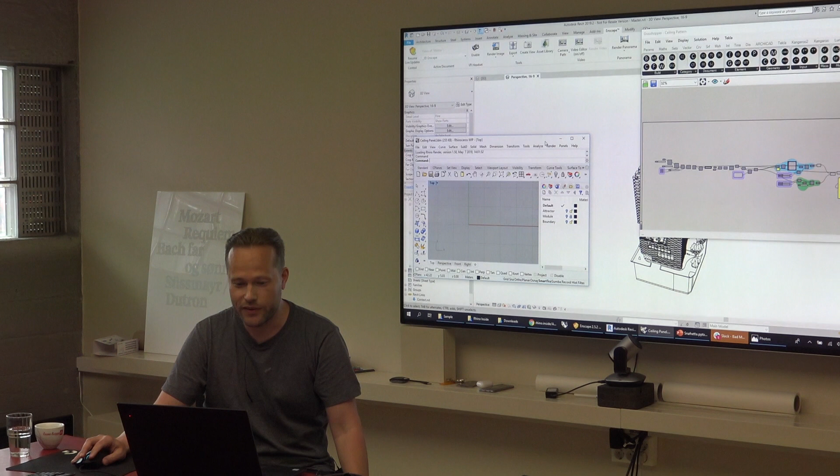So let's see what that looks like. I'm going to do this now, and with permission I asked to show some kind of fantasy workflow on the BLF project. I found one of the old Revit files from, I think, a long time ago - maybe something changed, but anyway, that's less important.

So basically what I do is pretty simple: you have a Revit project, and then you start Grasshopper from within the add-ins menu of the Revit project. Even the first time you click on it, it feels better than Dynamo, because you can start it in a perspective view, which is not allowed yet in Dynamo - Dynamo will just give you a red warning if you do that in perspective in Revit.

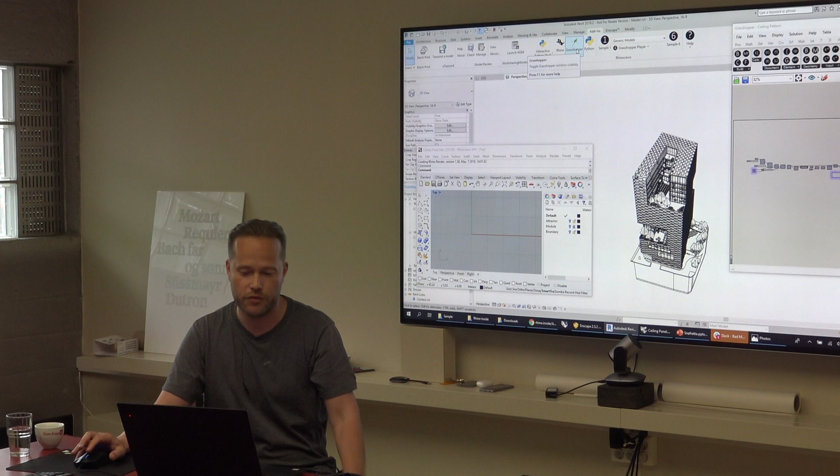And then you get something like this, which is everything Grasshopper with all the menus - Archicad, Tekla, Kangaroo, Lunchbox, and so on - and the Revit tab that interacts with the Revit API. It's funny that all the dots are black.

It's really, really early stuff, so they haven't done anything with the icons or anything. But who are they? Who is developing that? McNeel, okay.

Yeah, it's McNeel mostly, but it's an open source project on GitHub. It has a project for Revit, a project for AutoCAD, and I think even for some Adobe application. In Rhino Inside you can click and see Adobe Illustrator, Autodesk, and Revit. This is where all the Revit API functionality is being built by an increasing user community in addition to the McNeel guys. You can go here and read if you're interested.

So, have you ever found some comment from Autodesk about what they think about it? Nope, no. I just think they think it's great. If I was Autodesk, I would think it's great. And I think McNeel also thinks it's great, but I don't know about Autodesk. I don't really care.

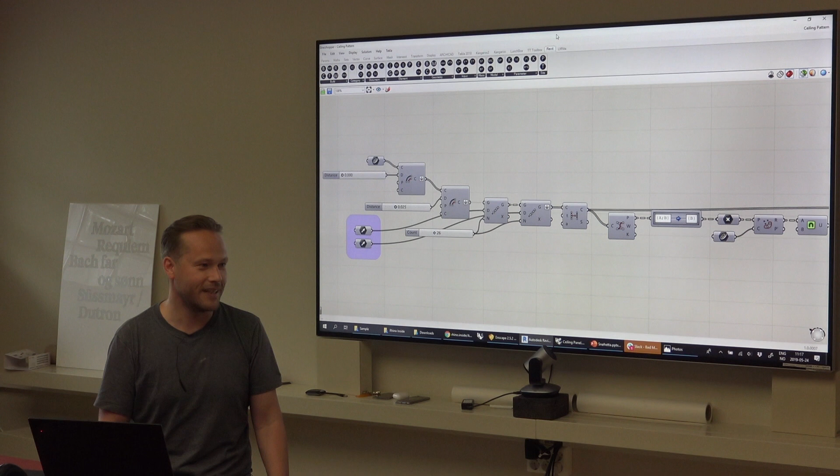No, Autodesk opened up the API for Revit in 2005, and by doing that you basically say anyone on the planet, five billion people, is free to develop add-ins or applications for our platform. So I don't think they discriminate who is doing that and who is not. So anyway...

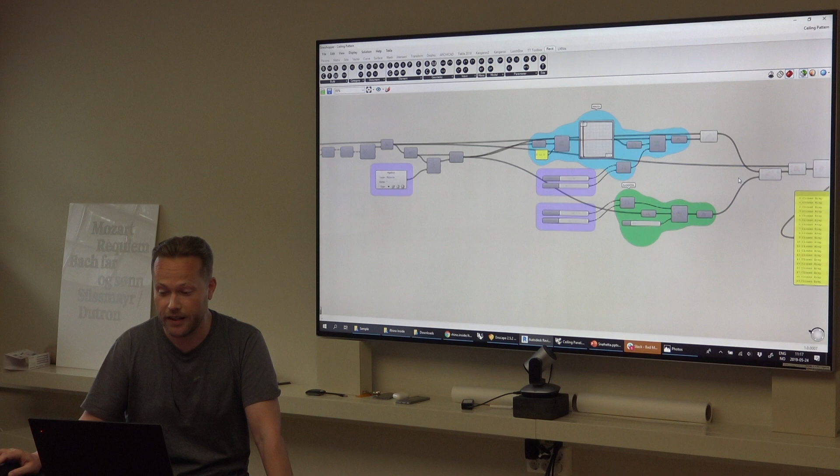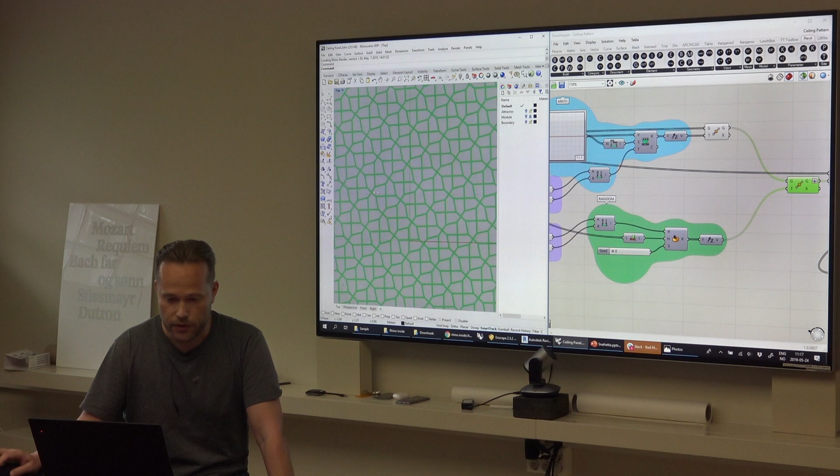This is - I was able to find some obscure Grasshopper script that was doing some kind of ceiling test on the BLF project. It has some math and some randomness, and if I do like this, you can see what it's doing. Yeah, so it's just a pattern of polylines that's being repeated in a grid.

Do you remember this? Yeah, Reynold does. I think it lasted for a few days, this exercise. But anyway, I'm just using it to show how this can work.

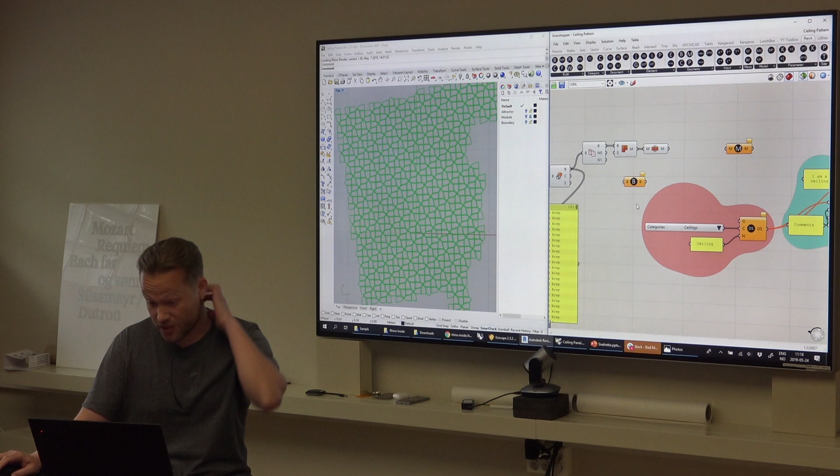So in the end here, I'm getting a bunch of B-reps. There are two attractor points as well, kind of creating this shape by the window behind the lecture in the lecture hall of the BLF.

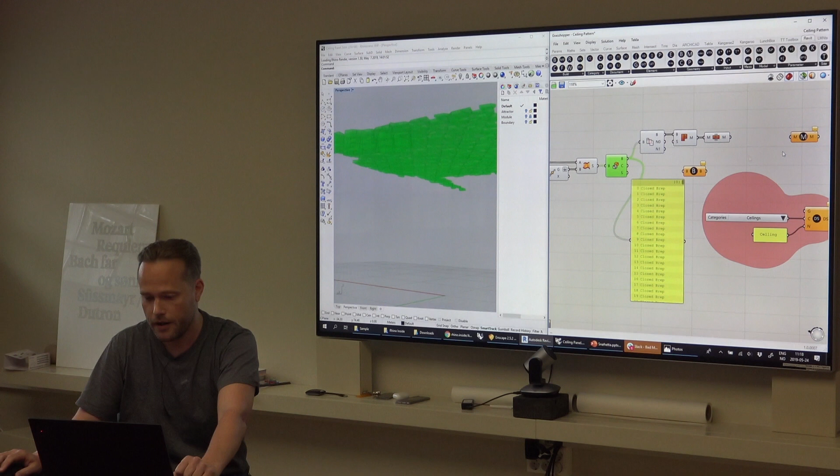And then I'm trying this now because this is kind of the development we're doing right now. I'm trying it with a bunch of closed B-reps, with some merged face B-reps, with a bunch of mesh and a joined mesh. So that's kind of what I'm testing now.

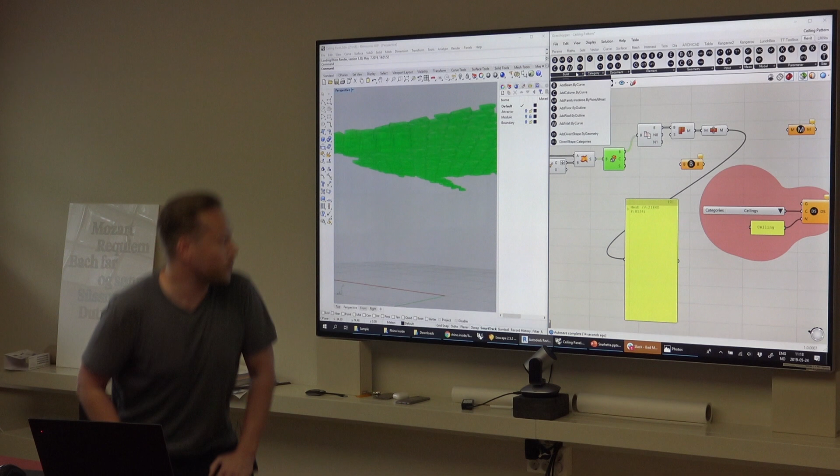You can, with the Revit menu, build a bunch of different things. But like I told you, Romana, on the phone, where Grasshopper for Rhino Inside really lacks is the amount of available commands. In Dynamo you have thousands of components you can do different things with, because there's a huge community that has been developing on it for like 5-6 years. Here it's a very limited amount of things you can do in Revit.

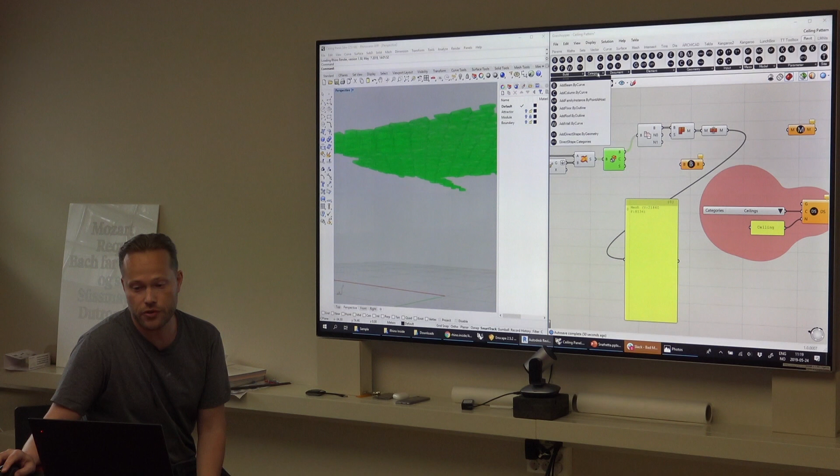So you can do a beam by curve, column by curve, floor by outline, roof by outline, and so on. So you can build native Revit elements based on Grasshopper data. You can also edit information, work with categories, extract document information, and also work with parameters - for instance, writing a parameter or reading a parameter from some Revit element, or a bunch of things.

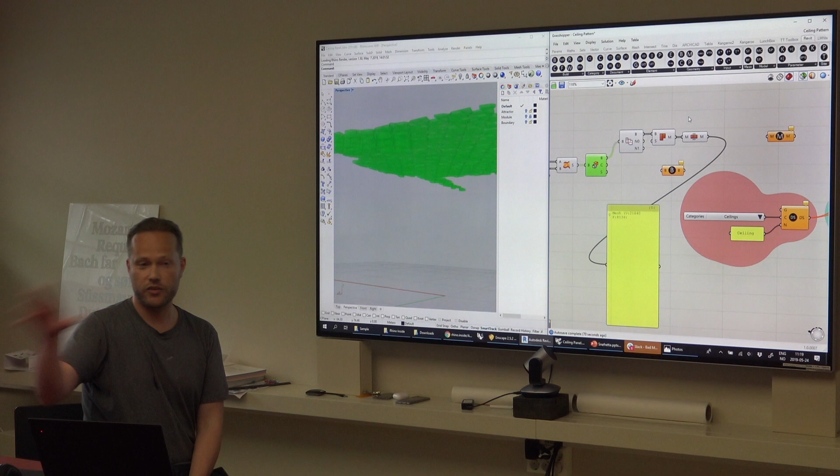So this first exercise, the first problem we're trying to solve, is to just get Rhino geometry into Revit in as good a way as possible, with materials, for force-project, sketch-project, schematic design kind of situations. So this is just a very...

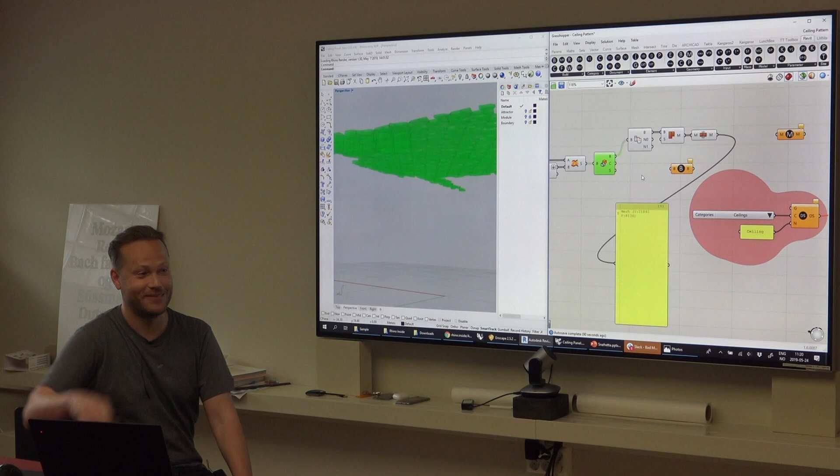Yeah, that's definitely kind of our main business model. So anyway, just want to show a couple of quick things of what this can become in Revit. I have a 3D view, and when I click on some node, the geometry preview is already a gazillion times better than the one in Dynamo.

And it responds to preview selection in the exact same way that Rhino does. And then there's a couple of different ways I can create geometry from Grasshopper inside Revit.

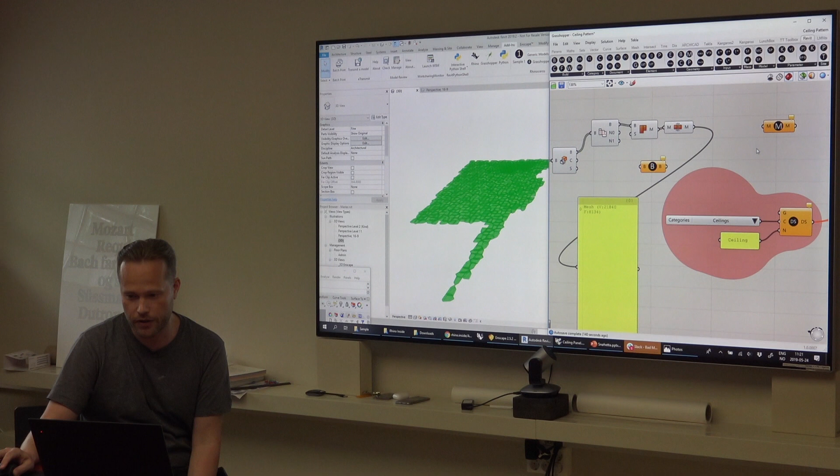We can try with, I have a B-rep. If I have a B-rep, there's a B-rep component. So when you hit the button in Grasshopper, it shows a preview in Revit that is not bakeable yet. Is that the thing? So you have to bake it with these buttons. And then, of course, with Rhino and Grasshopper, you can just right-click bake because they are the same.

In Revit, you have to say, in Revit's language, I want this to be something. I kind of bake as this or bake as that. And that's a whole crazy ball game to understand, because Revit can build so many different things. But in recent releases of Revit, they introduced first a direct shape element, which is just dumb geometry. That was what allowed them to do the link IFC feature in Revit many years ago, direct shape.

And then they also introduced an actual B-rep, so you can build a B-rep in Revit now. That's why you have an Add B-rep Shape by B-rep component. So that's a category, B-rep. But still, Revit's B-reps are more strict than Rhino's B-reps, so they sometimes still fail.

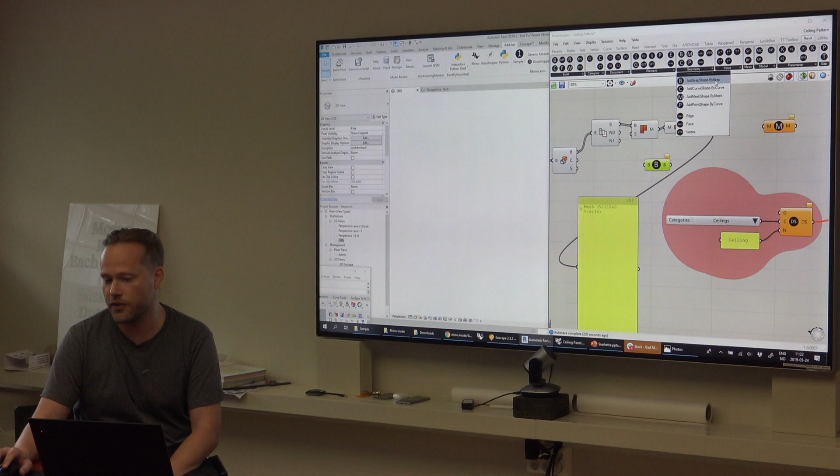But this is really interesting, and all we usually want to do in a schematic design situation is just build some geometry and put a material and category to it, and that's enough. So when I say generic model or whatever, you have a categories pull-down menu that pulls the Revit categories, and then you can assign categories to it.

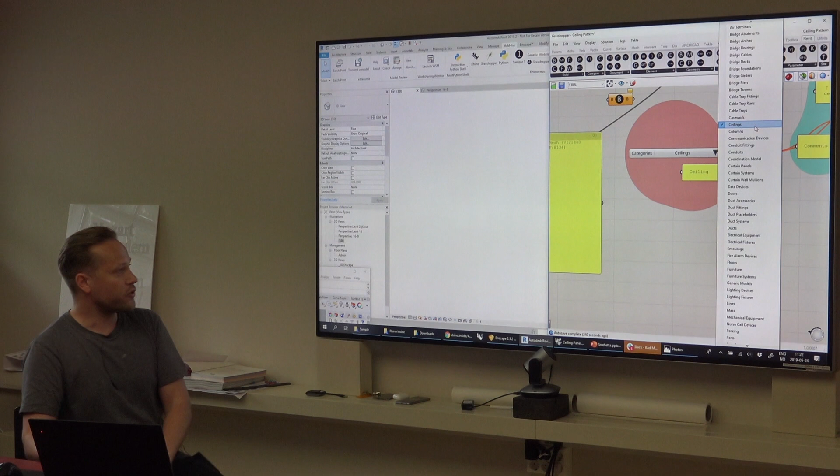So what we're trying to do now is just build so you select a category, it's a ceiling, it's a wall, it's a railing, it's a stair or whatever, and then you put some parameters to it, for instance like IFC class or whatever kind of information, and then we just want to build a bunch of stuff, like railing is specifically painful in Revit. So that's I think really interesting to be able to work in that way.

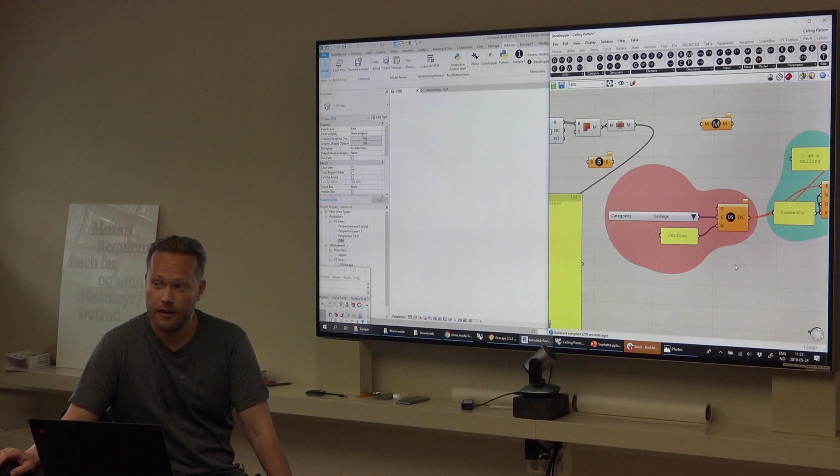Where is your input? The input here, it takes basically just a bound. It's in Rhino actually, so you can't open Grasshopper without the Rhino file? Yes, you can. But unless, actually the tool here says Rhino toggle Rhino window visibility.

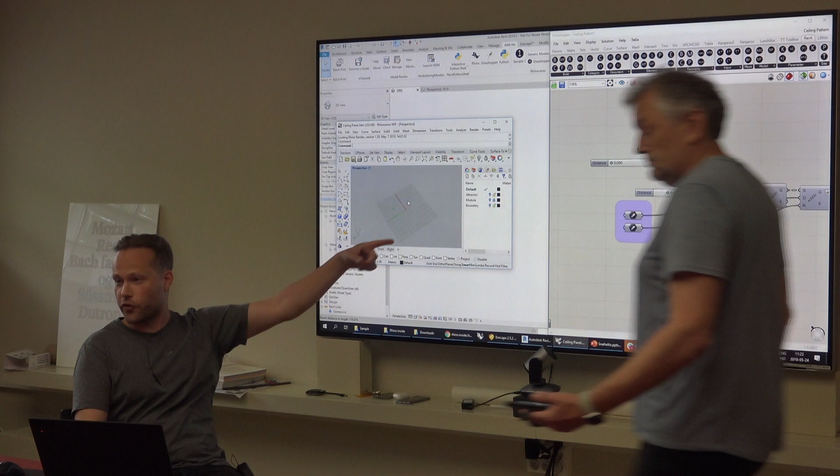So I think the moment you click on Grasshopper, it also opens up Rhino in the background. So these two processes are now running inside the Revit application. But you actually, if you reference some geometry from the Rhino window, you have to also open Rhino. Reference stuff from Revit.

Yeah. Where is that? Here? Here. Select edge, select face, select vertex, select element. But the only input you have here is a point. The only input I have here, I have a couple of attractor points, and points, and then a boundary, and kind of the main shape of the ceiling.

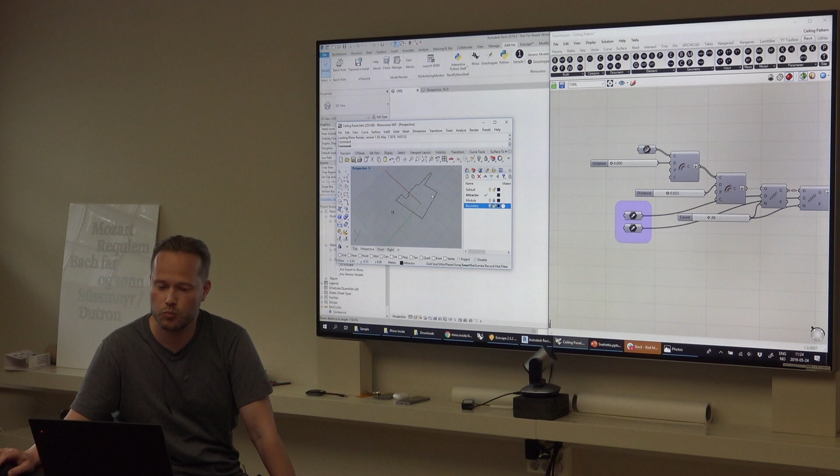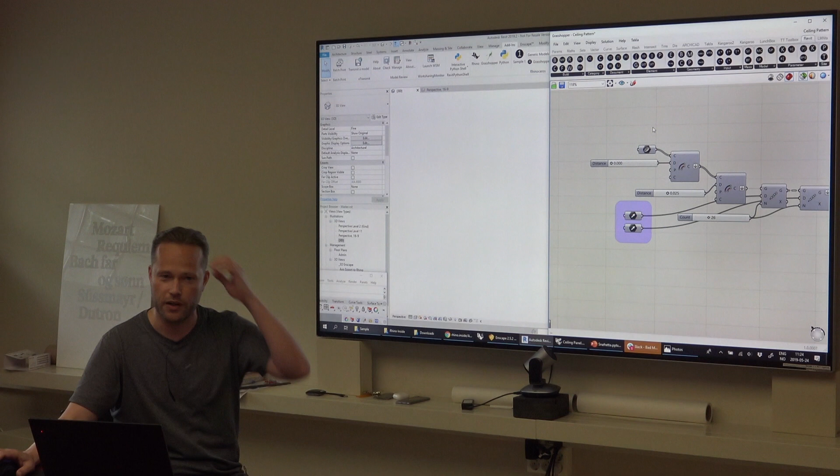Is that a Grasshopper and Rhino file that were done before, and then you open this pre-done file? Yes. Also forgot to mention, you need to have Rhino work in progress. It's not going to work on Rhino 5 or 6. You need to install Rhino work in progress. But if you have a licensed Rhino 6, that's not a problem, you just download it, but it expires after, I don't know, 30 or 40 days or something.

I think we have our analysis stuff. We have it. Instead of using that boundary line you have in Rhino, you can use a boundary line straight from Revit instead.

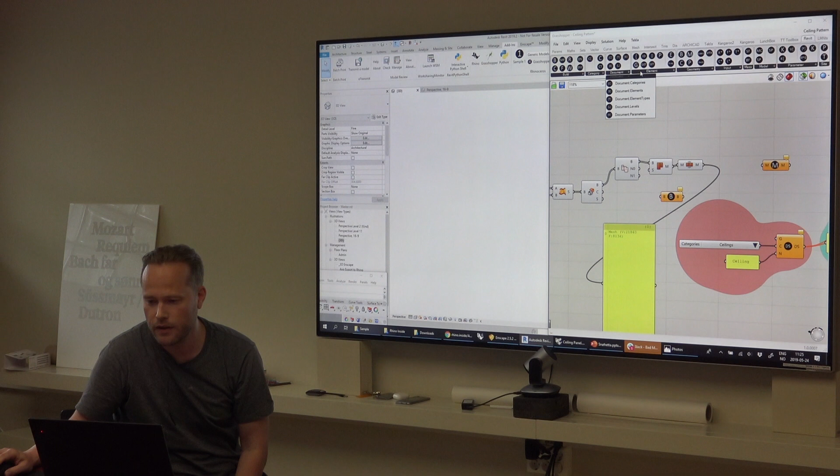Or like a floor, a regular floor? Yeah, like that. Select floor. Where is it? Somewhere here. You reference an element, document elements, or I don't remember. Do you need a Rhino file? No.

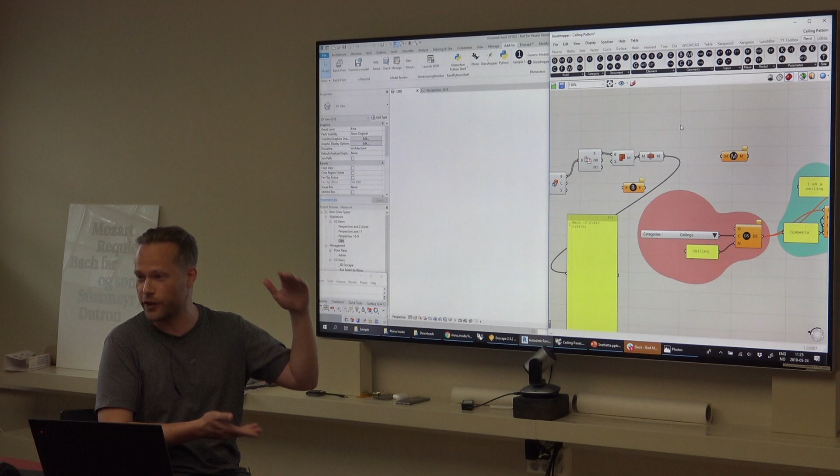Anyway, I just wanted to quickly, before we finish up, show how you can create a B-rep. This is a B-rep in Revit, or actually a bunch of B-reps.

And they are linked to the Grasshopper file. So whatever change I do now, if I move the attractor points or do whatever to the boundary, it's going to update. The funny thing is that in the first alpha version of Rhino Inside, they already solved kind of like the linking issue of Dynamo in a better way than Dynamo was able to. I'm talking a lot of shit about Dynamo now. Dynamo still has a lot of...

But, can you just show it? How, sorry? Can you just show it? Demonstrate it? What, that it's changing? Ah, that's like you're asking me to do the demo hell. Of course it's going to break, but yeah, maybe we can show it at the end. But I just wanted to show a couple of the other things.

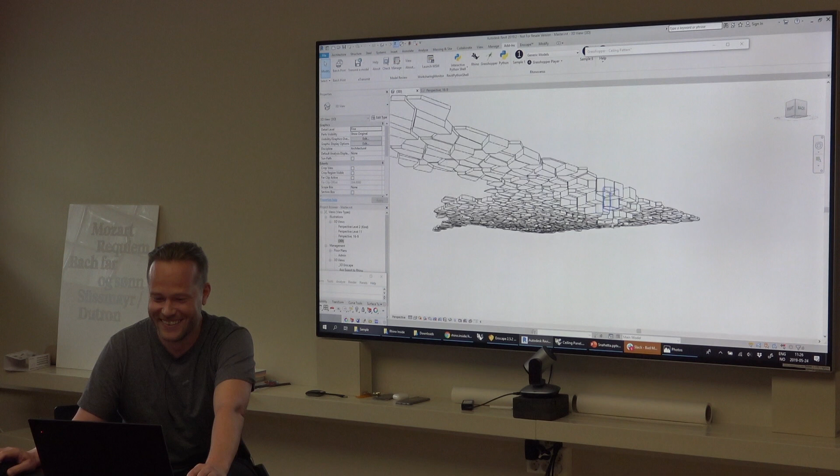No, so anyway, this is like more than 700 elements, and I think that was pretty quickly generated by Grasshopper, and it's separate elements, kind of like the facade cladding that we did on BLF. And now I can put a lot of information to these elements, but there's no material, and that's kind of the main thing missing right now for this to work.

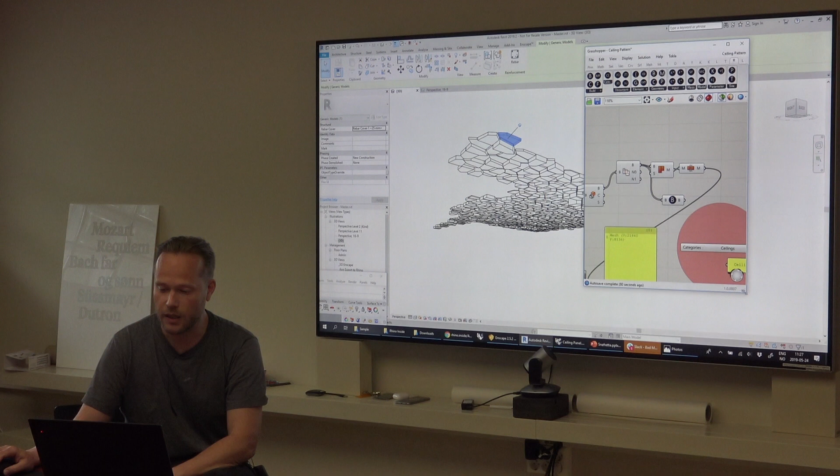So the B-rep generator doesn't have material or category or name input. It just takes a B-rep and creates a B-rep, and then you have to... so we have to build something.

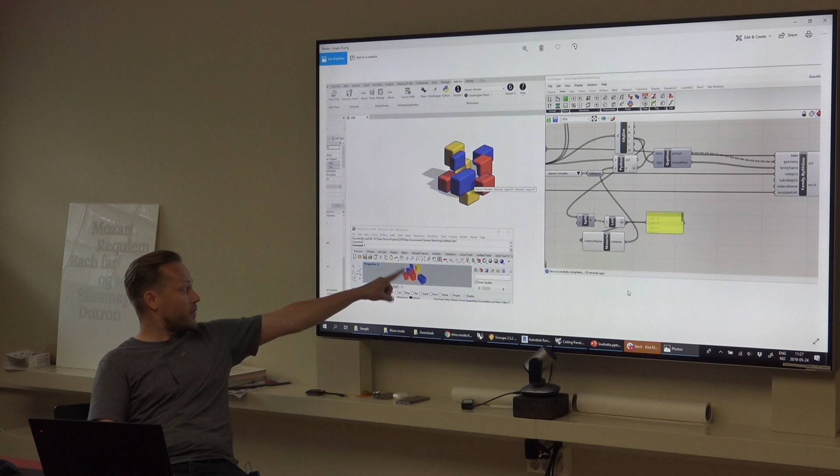I got this picture from Dimitar like 40 minutes ago, and I sent him a Rhino file with 3 different layers with 3 different materials, and I think now we're able actually to recreate that in Revit with also solid elements with materials. But I don't have that file here now.

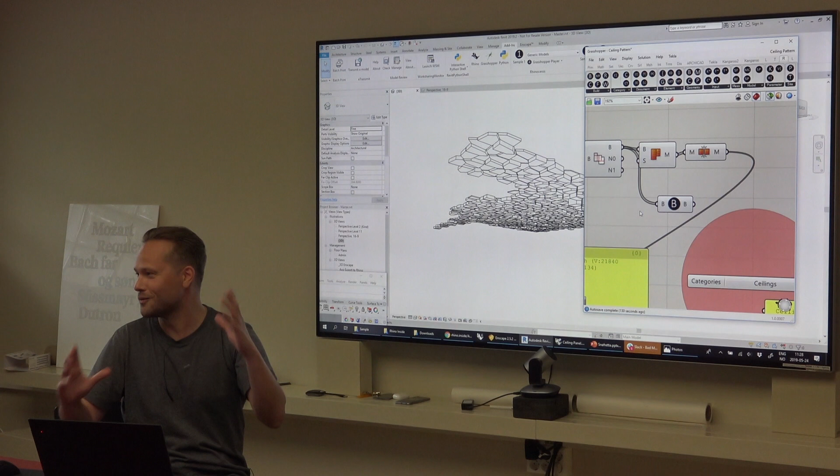And so yeah, this will update. Because basic materials, you were able to get those when you open a Rhino file in Revit - you will get a layer color. But then you change that material, and you delete it and import again a new version, and then it doesn't find this. So that's a broken workflow, and we're trying to make that better.

Also interesting is that it's locked. These elements are locked to the Grasshopper script as long as these elements are pinned. So if I unpin this element, it's going to create a duplicate with the Grasshopper, and then forget about the previous element. So if you then create a new one, you will have two.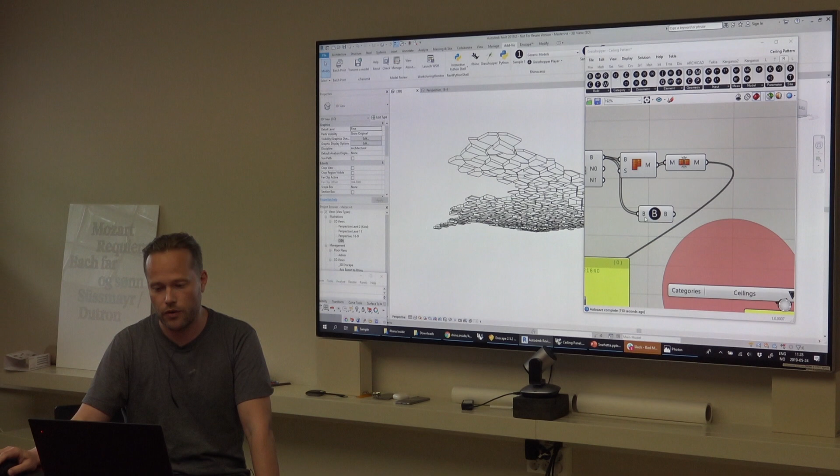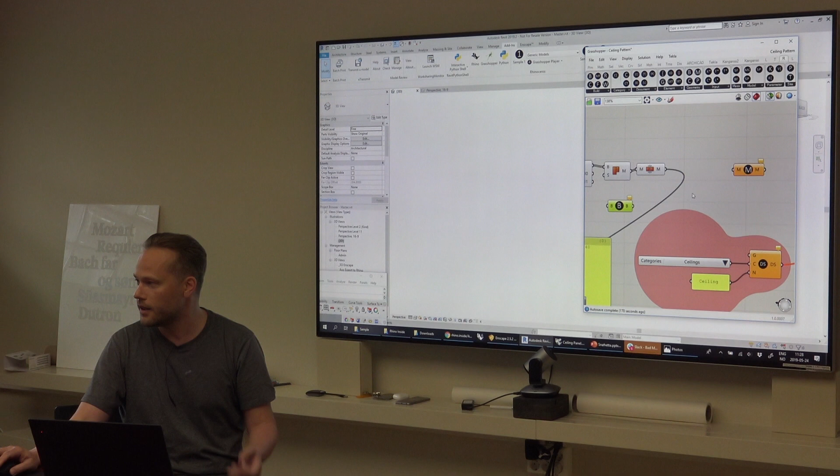I will disconnect this guy here, and then I'm going to select all of these guys, unpin them, and then delete them. There's a lot of this, like how Grasshopper is now interacting with Revit, that doesn't work that well. But I think the potential is amazing.

So I can also show how it can create one uniform mesh, because as you saw in the picture, I have blue, red, yellow. I want them to be the same material, and I want them to also be the same element, because you don't want 4,000 stones inside a Revit model. It's huge. So you want 1, 2, 3 elements, and this is tricky.

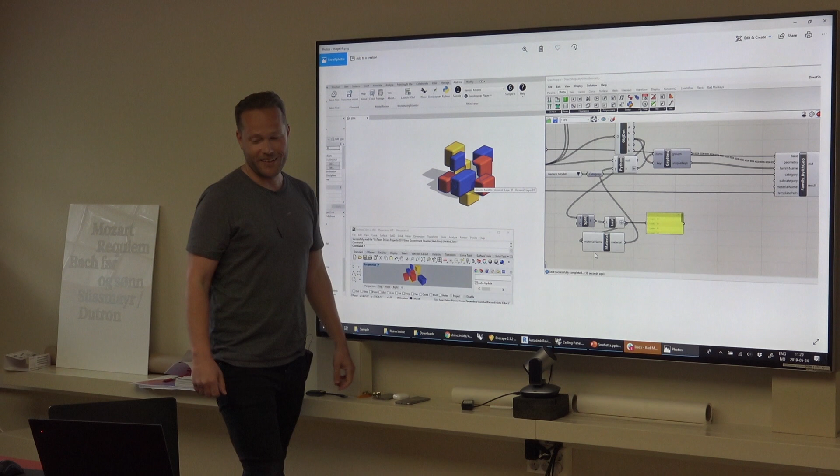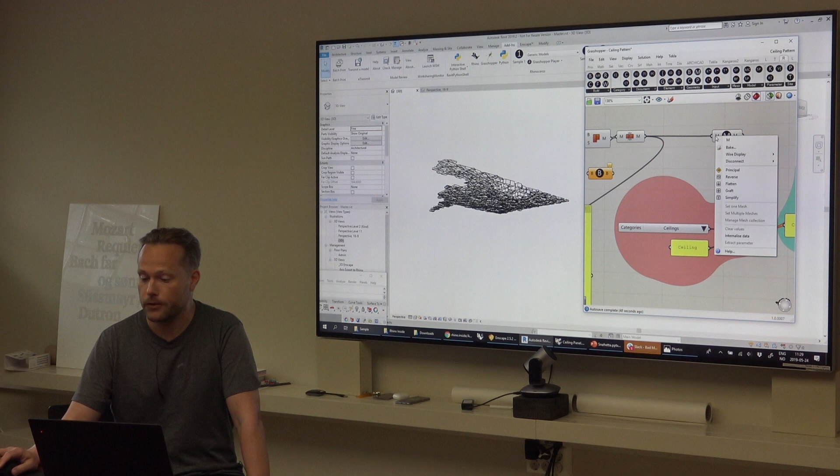Yes, Martin. You're not baking it; it's just baked immediately when you plug it in. Yeah, and then one point in future, you're going to be... I don't think that works now, but I want to be able to right-click and bake, and then it loses the connection. So that should be pretty simple, probably. You just need to unpin it, basically, in Revit. But would you be able to reconnect it again, then, you think? I don't know.

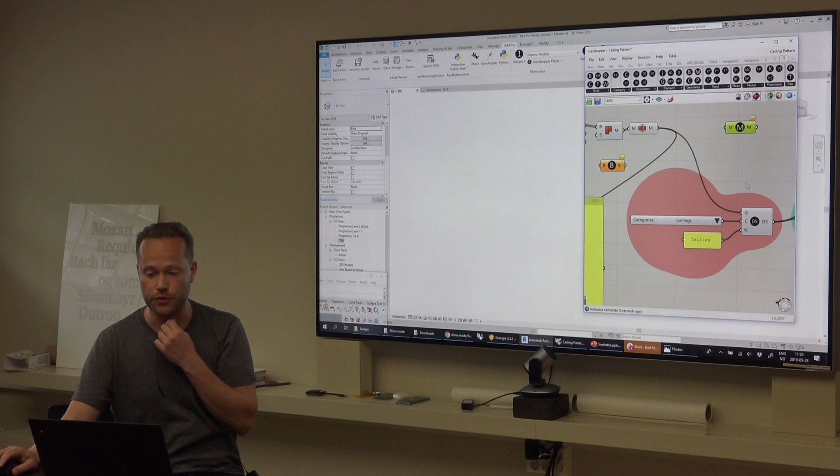So I'm going to take that one guy away and just show quickly the last option we have for dumb geometry, which is a direct shape that can take any type of geometry, whether it's a mesh or a B-rep, open or closed, and then assign a category to it. Because these previous two guys, you can create a mesh in Revit, you can create a B-rep in Revit, but they don't have material, category, or any kind of other input. But the direct shape does have category and name, but not material. So that's what we're working on right now.

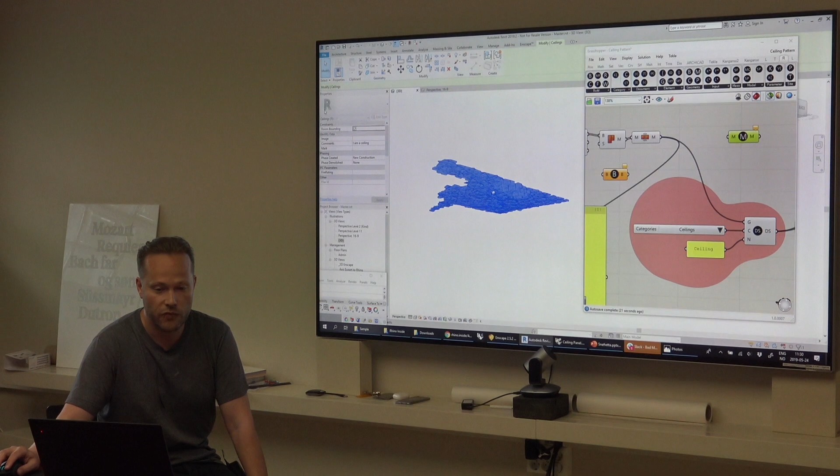So this now will become a ceiling element. Ceiling. And you can also add some parameters to it. I am a ceiling. All right.

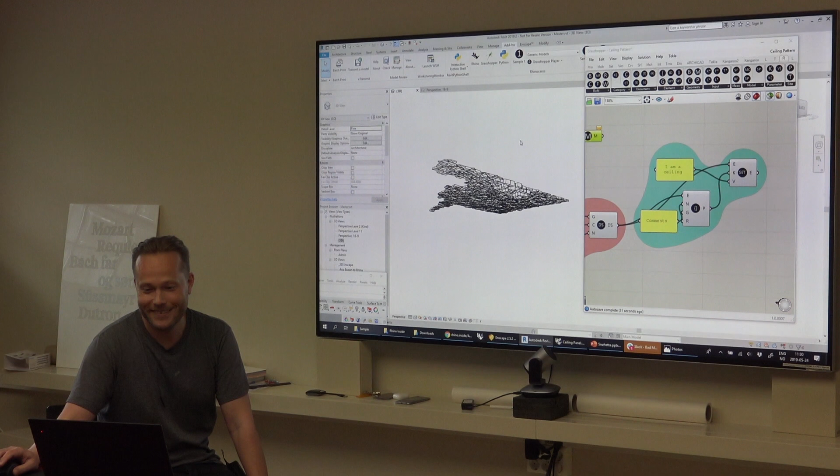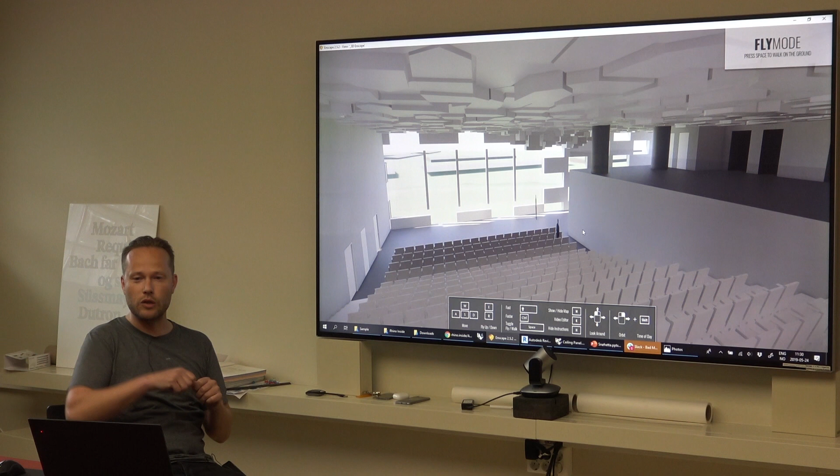And then, of course, it's all updated in Enscape. So that kind of workflow I see now a lot of architects are using to work in parametric, not to model one wall and one door, but to model more complex shapes.

Every time you modify an element, if you have more than 50 or 100 elements, it makes sense to make a script, whether or not you're the only one using it, or you want to share it with others to scale that value. And going from there to a gaming environment in Lumion, Unreal, or Enscape, being inside that model, that's something I see a lot of people are now really interested in.

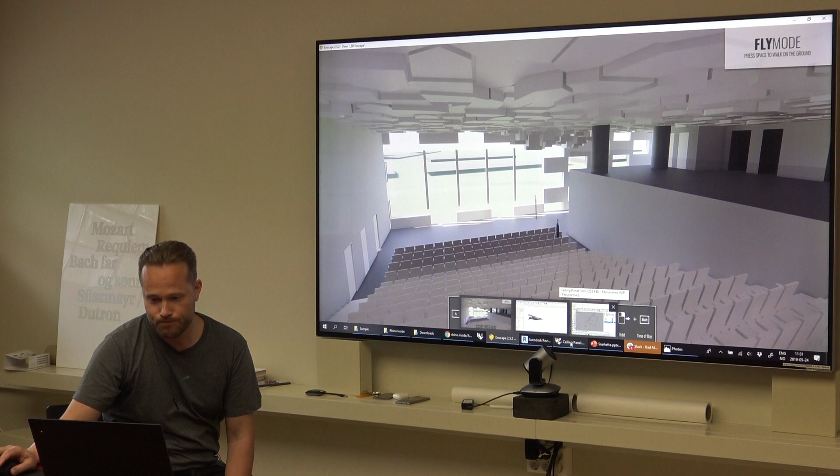Just to finish up the presentation itself, I wanted to repeat what I just said I guess. Future. Is there a future? Yeah, something like that, there we are, let's go.

10 years ago, you had one tool. Today, maybe you have 3, 4, 5, 6. In the future, I think people are going to have a big collection of tools, and it's a difficult job to connect all these into one workflow.

I know the guys I'm working with at the government quarter, they are using Revit, Rhino, Grasshopper, interior architects with ArchiCAD, engineers with Tekla, Enscape for visualization, and then exporting to CFD, and I'm the Revit API guy. Stitching this whole system together without exports and imports is one thing we're trying to solve, and the other is more automation-based design, documentation, and communication.

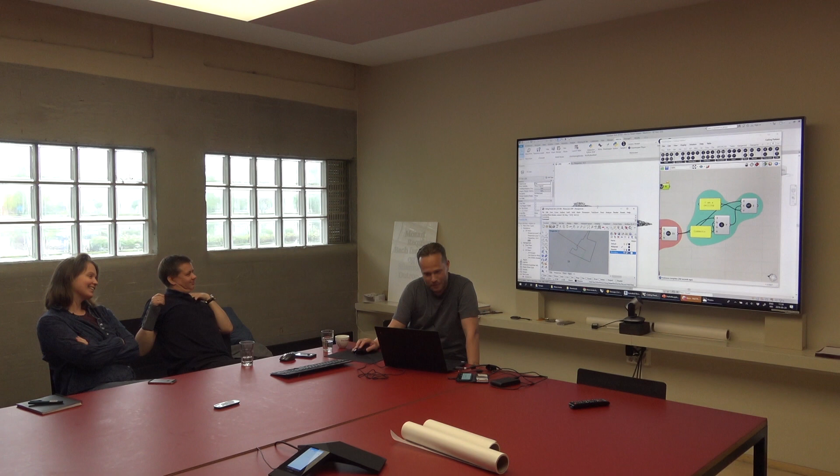Now you are free to leave, but if you want to hang back, I will sit here until lunch, I guess. Can you just drag the slider and change the shape? I was hoping you had forgotten. Maybe we can do something fun, Martin.

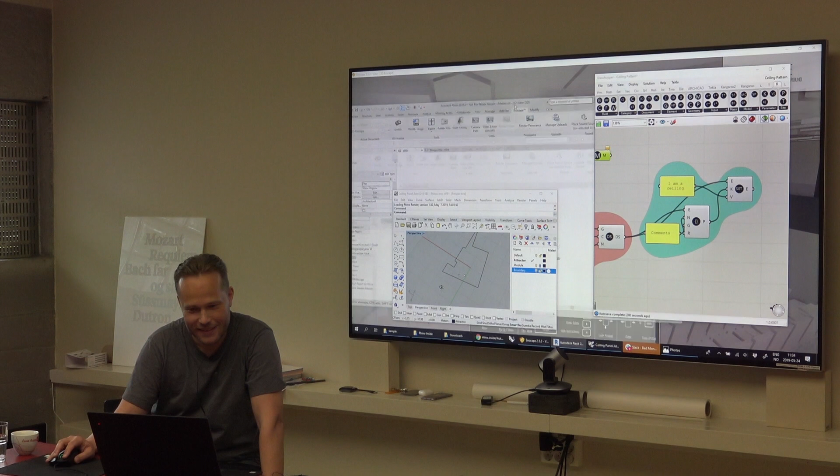What if we just try... I'm going to say Enscape, resume live updates. That's a good idea. And then minimize everything except Enscape and Grasshopper. Let's see, but if I minimize Revit it's going to also minimize Grasshopper, so I have to keep it down here. Okay, like this. And then Rhino, we don't need you.

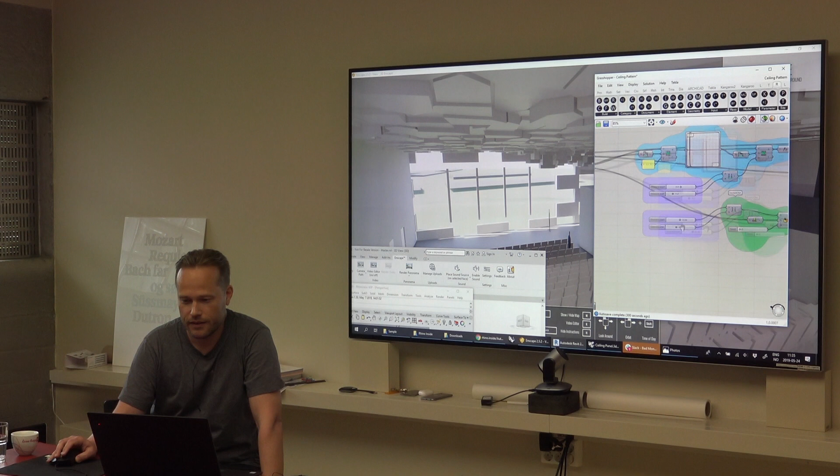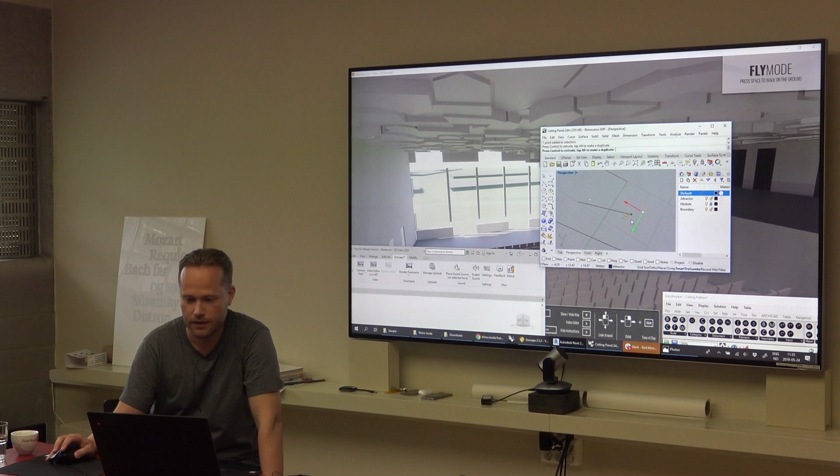Let's see what we can change. You just move the attractor point. Yeah, then I'm going to take down Grasshopper and open this and then take that point. I need to do it like this. Where's my gumball? There. Let's move it over here.

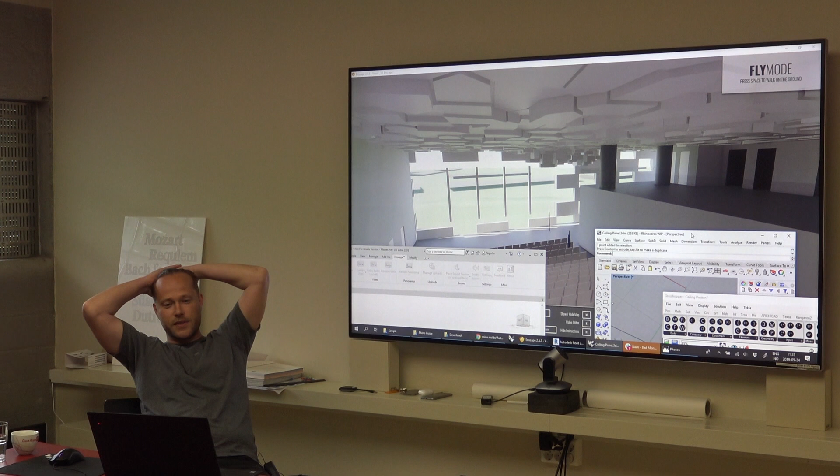It's a pretty big Revit model, so it probably takes a little bit of time until Enscape updates, but I can clearly see Revit working. Oh, there we are.

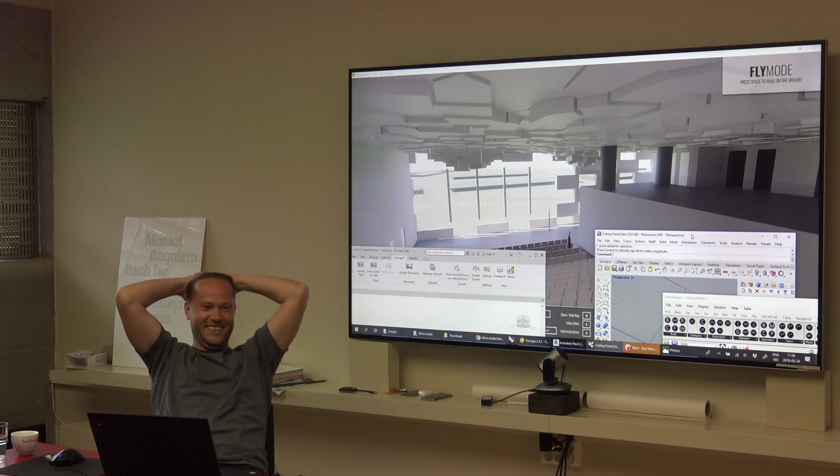I am quite amazed, I'm just wondering about your thoughts on the next step, or differences between Rhino Inside and Dynamo - how Dynamo is... it is still better, but I see kind of the direction going different. So what does Dynamo have? What's the future of Dynamo?

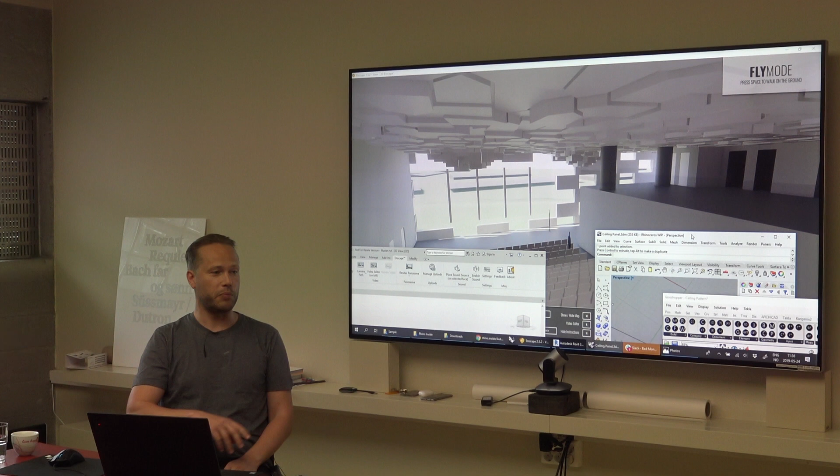I think where Dynamo actually has real potential that Grasshopper will never have is automating Revit. You can create a Dynamo script that opens 500 Revit models, runs 500 Dynamo graphs on each model, and just creates a bunch of data. You can automate Revit because Dynamo can tell a Revit session what to do.

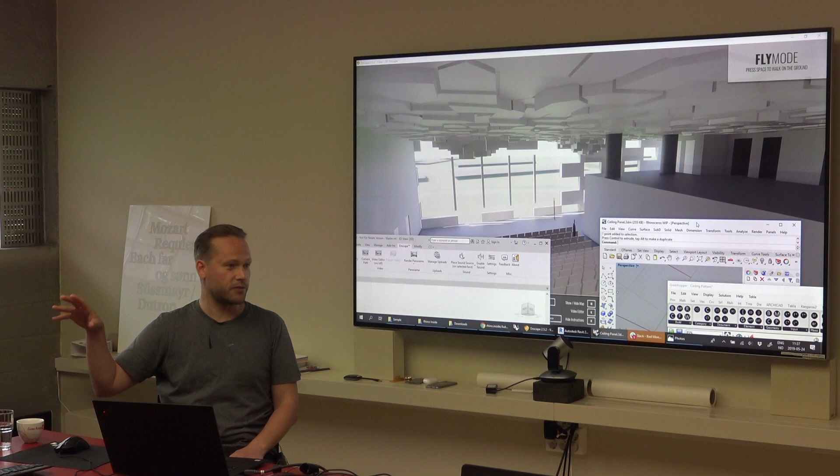Extract all the walls and all the information on all the walls and put it in an Excel spreadsheet by tomorrow morning. That kind of stuff is what we're trying to do a lot on the government quarter and also elsewhere.

If you've used both programs, the Grasshopper user interface with shortcuts like Control E, Control Q, moving around, copying, how lists work, I think it's a little similar in both, but it just feels so nice to work with geometry in Grasshopper. People doing geometry in Dynamo won't do it for very long, but people managing data in Revit will continue to use Dynamo.

Numbers and text - how much data can you transfer? Can you transfer numbering and lettering and anything like areas?

So when you do schemes for this type of roof, how useful is it? Well, the lines are everything is there, so you can easily do drafting and measurements.

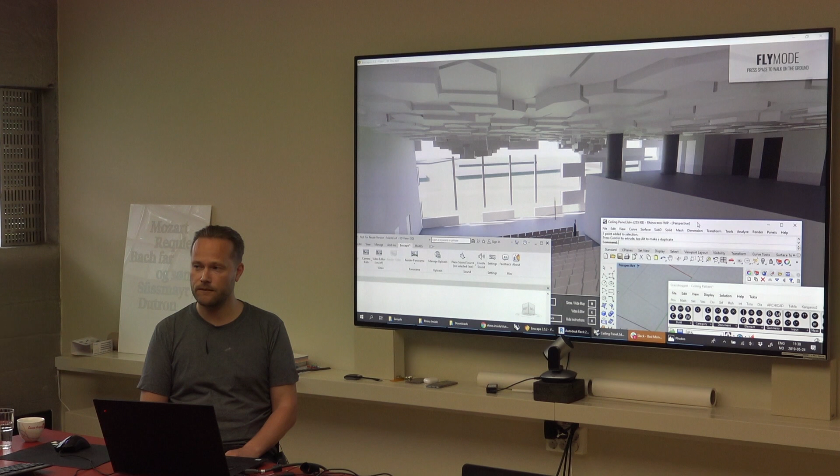That comes back to how good a job the McNeel guys on GitHub are doing this, because Rhino and Revit are at the core of the software.

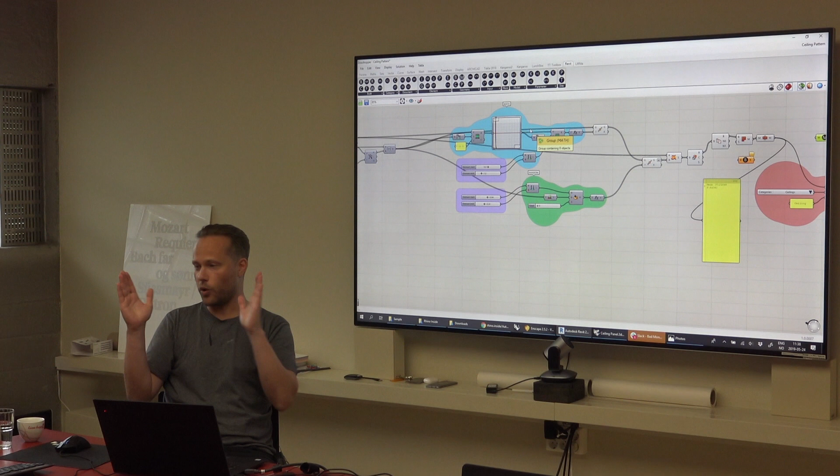You may remember when Angel Velez came here and said that any modeling tool in the world has a different understanding of tolerance. Revit has a different tolerance than Rhino does. So when Rhino models something and Revit is supposed to understand it, like what is a parallel curve, that's a tolerance issue. Whether or not you can dimension two surfaces kind of depends on what happens between this node and this node.

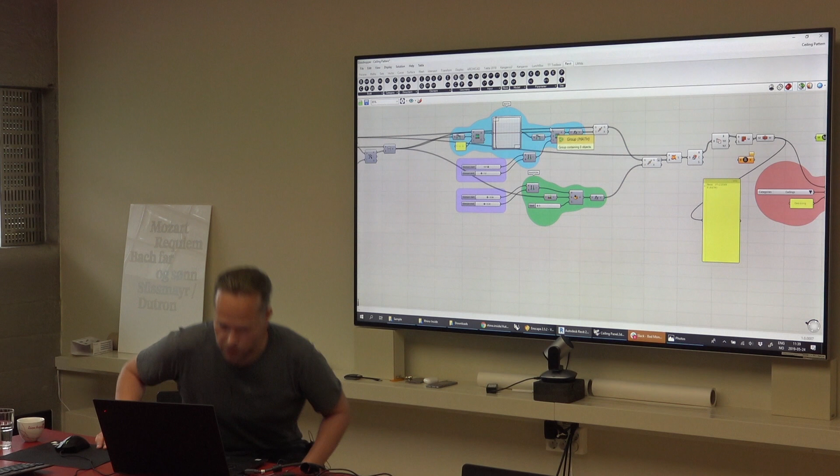I don't have a super simple answer to that, but it's not very smart because very often when you export things from Rhino, which are perfectly fine in Rhino - they're closed, they're not complicated - 5 of them appear in Revit, but 7 don't. And you don't know why. It's weird.

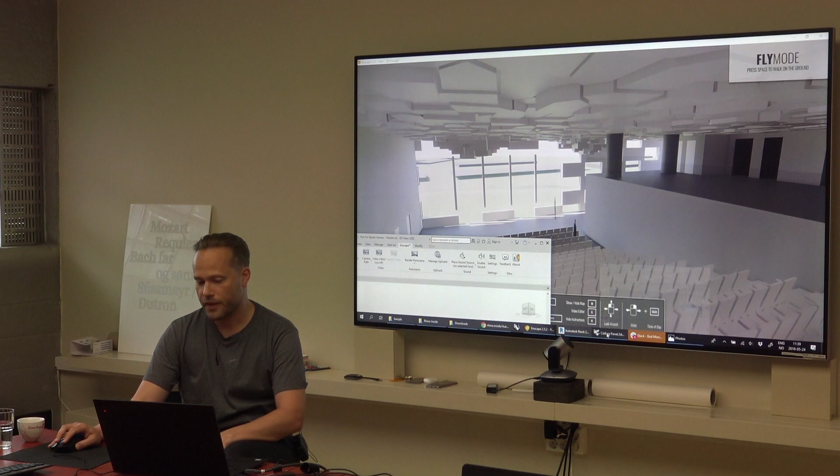And how is it now? Does it work for doing sections and plan drawings and stuff? Oh, that's why we're doing this. It works a lot better now because Revit has become much easier to work with geometry by the introduction of B-reps.

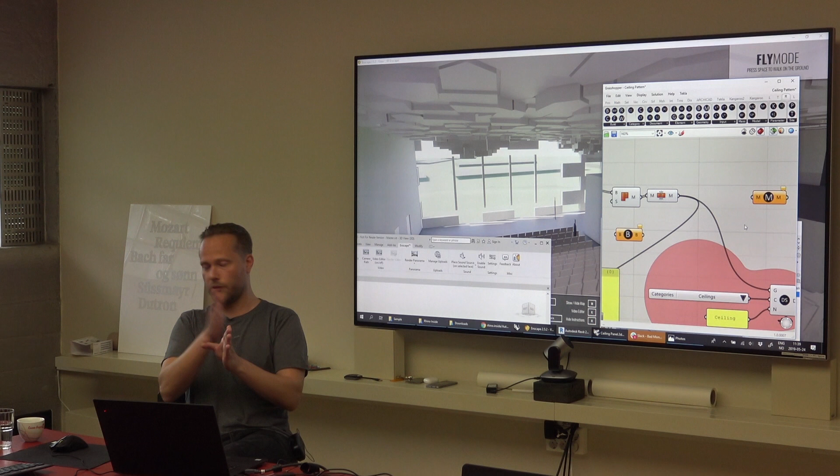You can model a mesh, you can do a direct shape in Revit, and you can still dimension to parallels, parallel surfaces, and you can tag them and apply materials to them and categories and so on.

Which means that at the end you can export an IFC and send it to whoever the building owner is and say, look what we have. And ideally you would make all the sheets, and then you can change it and all the dimensions and annotations will change.

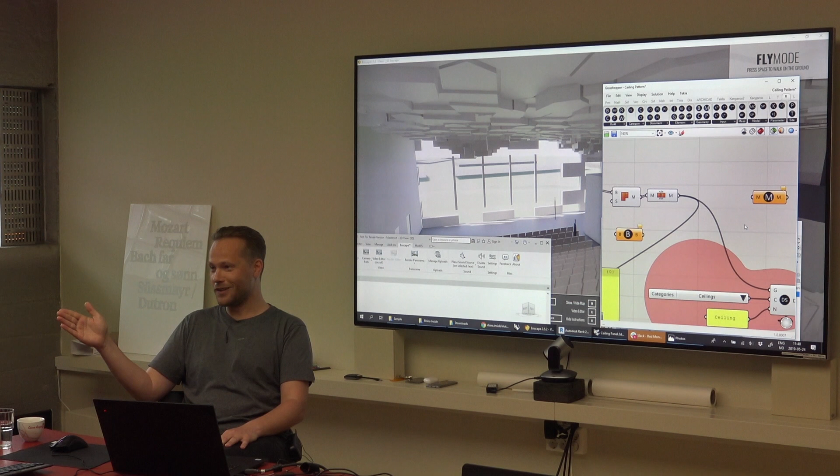No, that's tricky, because when you dimension the openings, the window openings in a wall, the dimension line knows which element ID of the reference inside the window family. The window family in Revit has reference planes, and those reference planes have element IDs, which is just a number. Then the dimension line understands that reference.

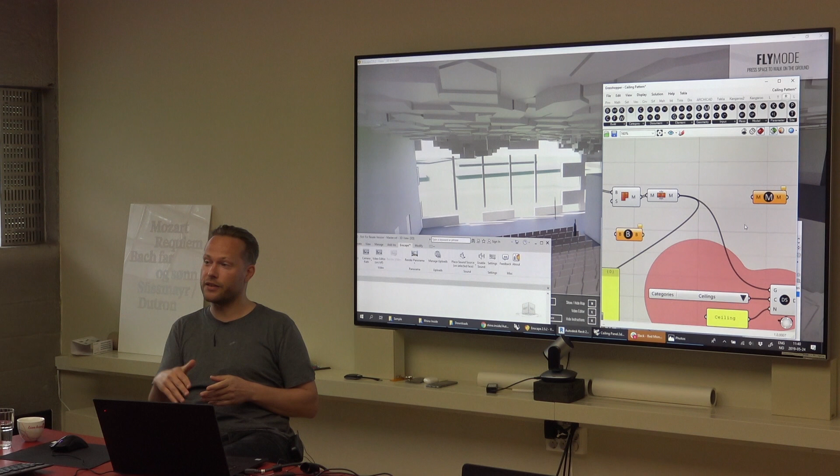It remembers - that's why when you move a window, the dimension line moves. It's that the dimension line knows this reference. But then when you start doing this between Rhino and Revit, that's a difficult thing. I'm hoping that will work better. Face to face, it's the same face, it's just larger.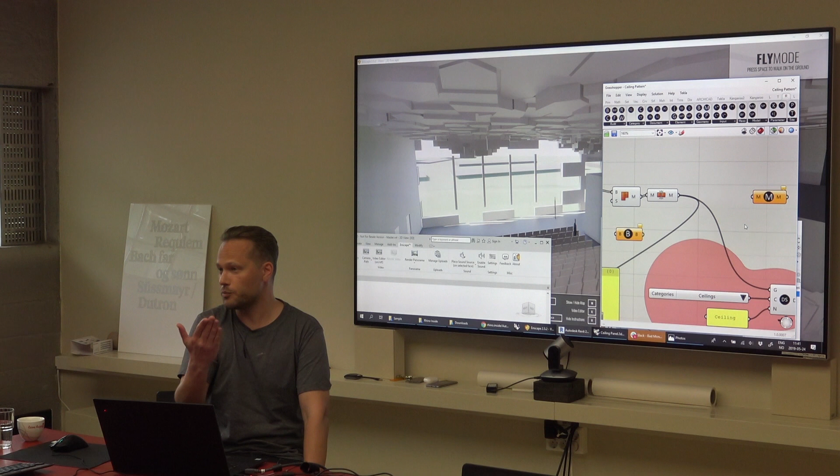What I think is I will no longer export a DWG or an SAT file from Rhino. I will create it from within the Revit application. I hope that those IDs are going to be remembered in a better way and just updated.

What about speed? Because yesterday when we imported some files from Rhino, the whole model got really slow. So how will this affect speed?

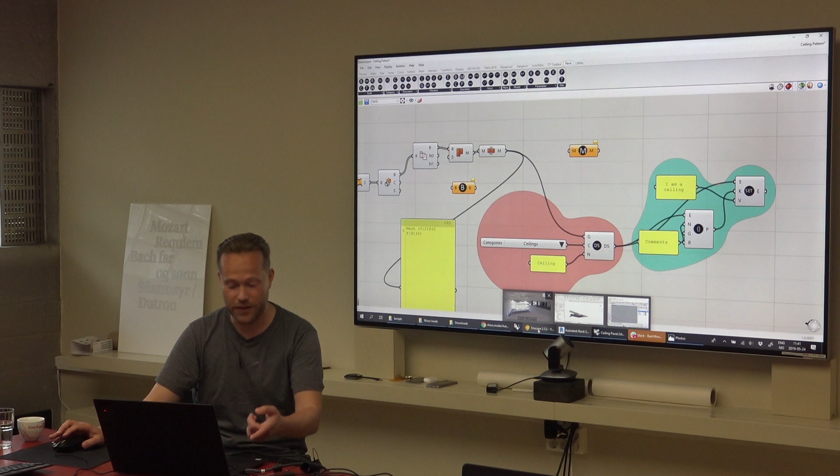It kind of depends - how strong is your machine? It doesn't look so strong, but it seems to run well. And this fan is crazy - so the fact that the fan is not running is beyond me.

No, it depends on your understanding of geometry and the Revit API. The easy explanation here is that I have a bunch of complex elements, like 700 plus, and then I'm creating one mesh with several hundred surfaces, but just one instance. That's going to be much easier for the Revit database to handle than 700 instances.

What about the other way around? I have a Revit model, or project in Revit, and I want to create a complicated shape, so I have to use Rhino for that. Now I'm exporting the Revit model and importing it into Rhino, modeling that thing in Rhino, and then putting it back into Revit. So is there a workflow for this? Can I open a Revit file in Rhino with that?

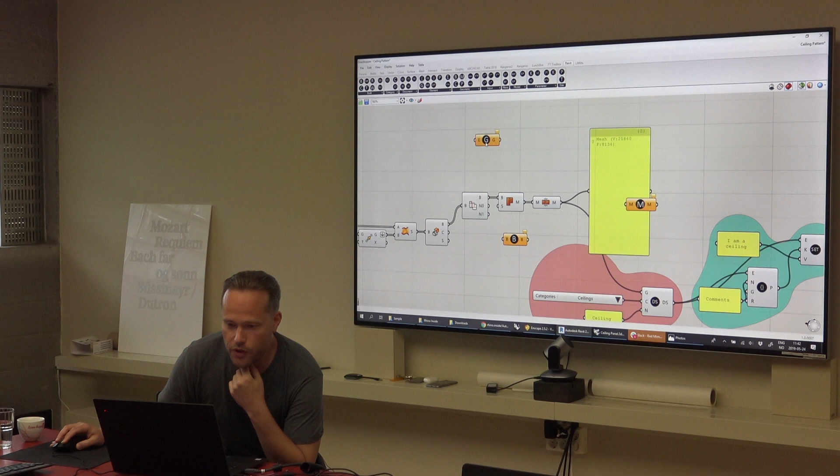You can. You have this element geometry component that can extract any geometry from an element that you select. But I really haven't... you have a select element here somewhere.

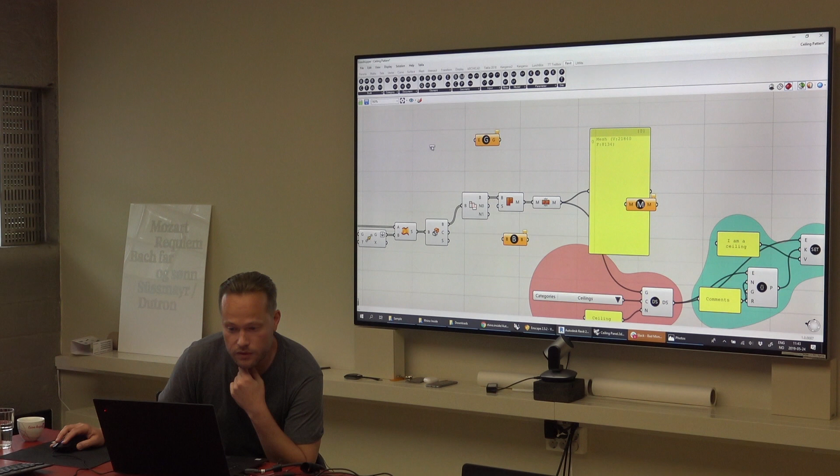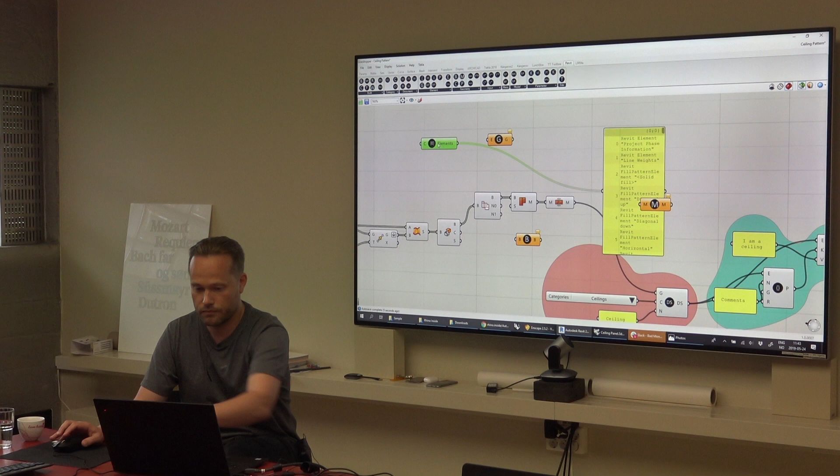I think the most important thing is that we now know that tool exists, and we can start to test on that. Is the tool meant to be used because we're used to whenever we need to get something from Rhino into Revit, it's sort of a one-time job because you can't do anything about it after it's in Revit, right? Or is this meant to run all the time, so every time you're working on the Revit model, all these scripts are running? If you have to tweak something after you've put it inside and baked it, can you tweak it in Revit, or do you have to go back, plug into Grasshopper again, and tweak it there?

That depends on what you're doing. In the case of this ceiling, if there are a couple of chunks that are in the way, I understand they're the same element, but they are several instances, so you can delete some without deleting all of them. If you want one to be longer or shorter or deeper, can you fix that in Revit, or do you have to go back and do it in Grasshopper?

You can do whatever you want. You can do that, or you can make it dead geometry. The more dead the geometry is, the less you can interact with it - that's the basic rule. The mesh I just created is super fast, but it's dead geometry in Revit. Of course, you can still change it in Rhino and Grasshopper.

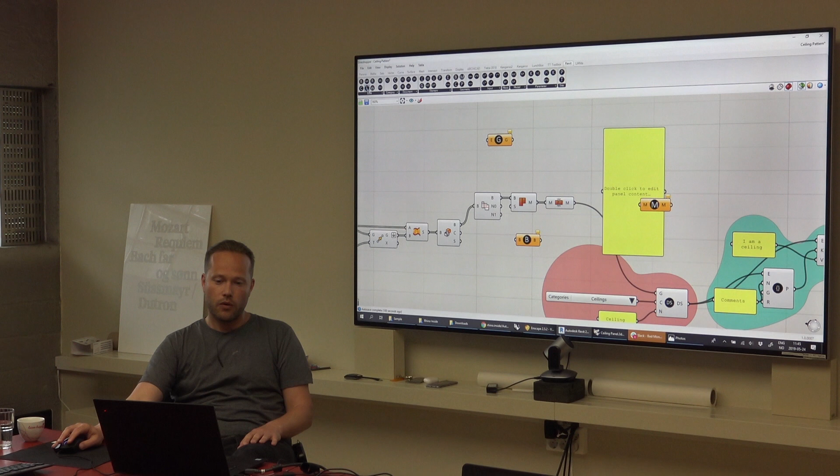But if you had a floor and made something into a floor, would you be able to edit the outlines later? Yes, you would. But it's difficult to take it back again because then it doesn't relate to the script you already made. As soon as you've given it an ID, that's the question - how far you can go so that Revit still remembers the same ID.

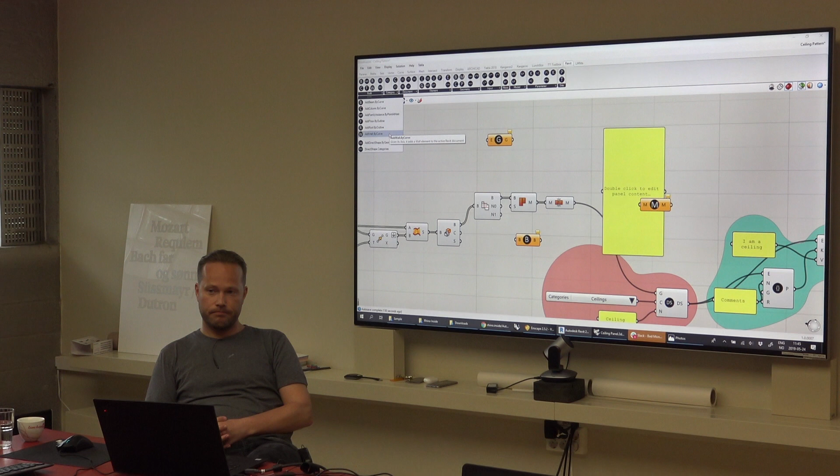Isn't it like baked geometry? So when you bake it in Rhino, it's the same thing. And then you can edit it in Rhino, but it's not linked to the script anymore. Right, it's the same thing. Exactly the same thing.

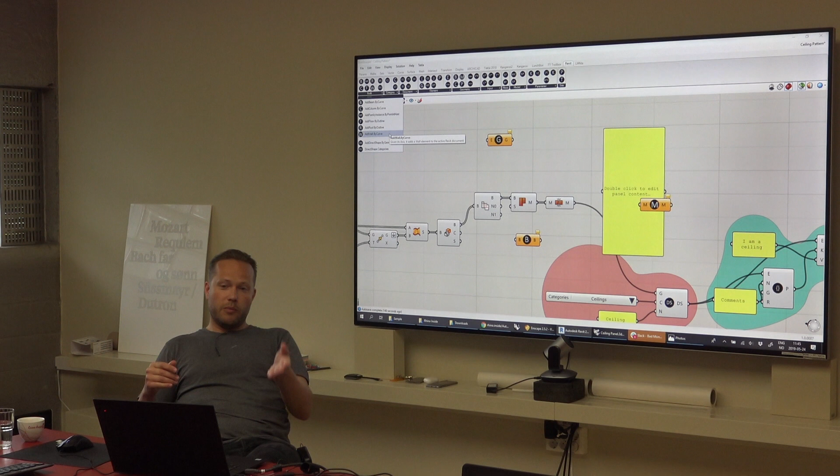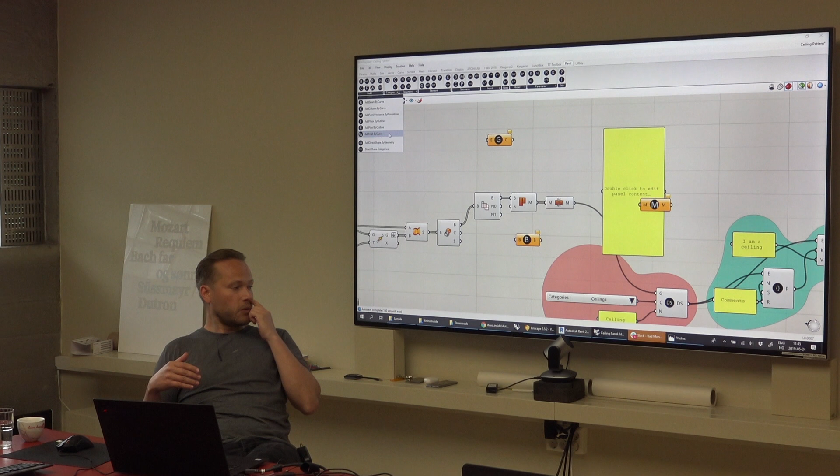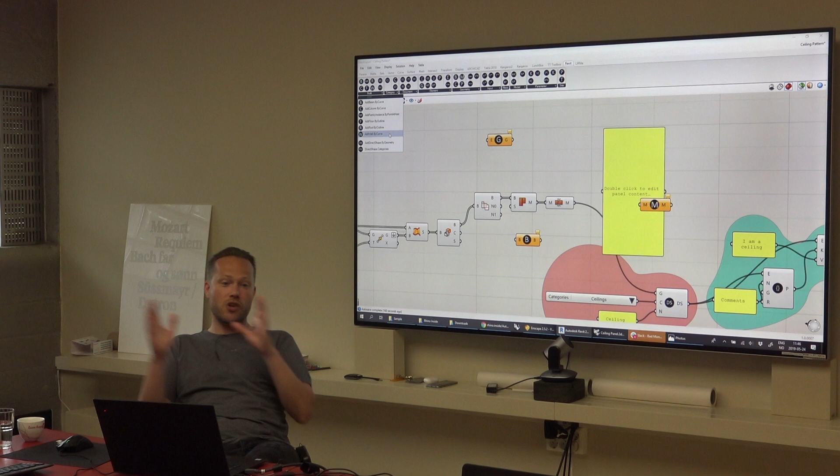One of the really basic examples - the Le Mans facade is an example of that. We had the opportunity to just link in that geometry, and we were doing that even before I came here, and during that fall too. But then we decided we wanted the opportunity to go around the walls, maybe move some elements, change something manually, or delete some panels. So instead of creating geometry, we placed native geometry with either a point or a line or something. The difference is this: if you're making a beam, column, family instance, floor, roof, or wall, you're creating a native Revit element just like you would with the mouse.

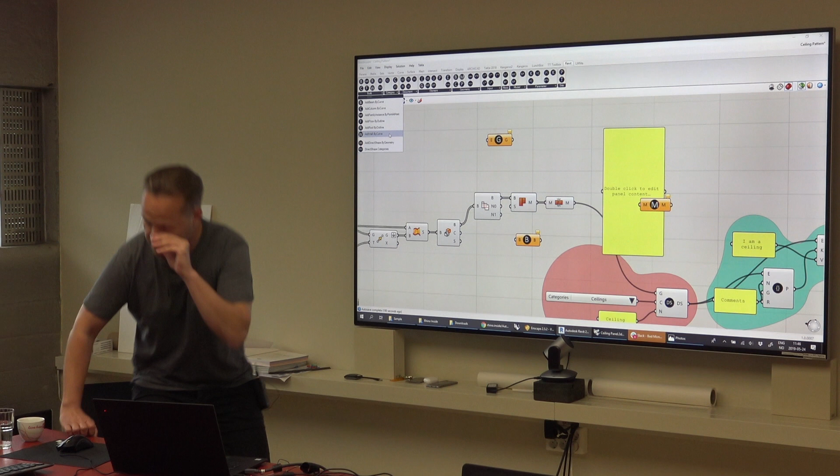But if you're creating a direct shape, which is just like a blob, then that's a slave of the Grasshopper script and you cannot edit it directly. Can you imagine a workflow where you just have a Rhino file as a base, where you drop the geometry you want to import into Revit, and then use a simple script that just links elements? Basically it automatically sends things from your Rhino model to Revit, so that you can work on your side in Revit while someone else works on their side in Rhino.

You just update this Rhino file all the time, and it links the geometry automatically to the Revit model, maybe with the geometry pipeline or something. Yes, as long as you don't unpin it, it's still connected, right? Yeah, but now you're talking about referencing Revit geometry and creating Rhino geometry, right? No, the opposite.

So you work on geometry using the script, on your Rhino file, maybe not using Grasshopper. You just make your B-reps and stuff, and instead of exporting them one by one into Revit, you use this tool to link the geometry with pipelines. Yes, like you have a dump Rhino file, drop the geometry with layers, and then it automatically sends it to the Revit model at the right place.

What I would do is work separately, because the Rhino and Grasshopper application running inside Revit feels slower than working with a disconnected Revit, Rhino and Grasshopper application, because it's always talking to Revit. It's like always on the phone: what's going on, did anything change, blah blah blah, so shut up.

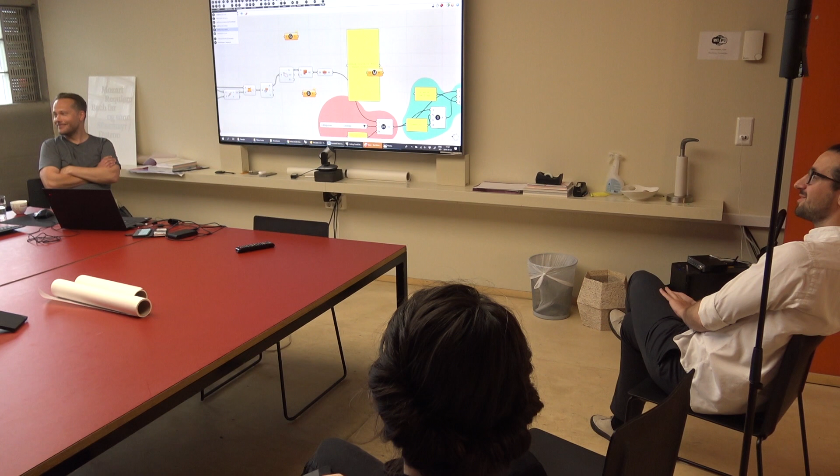Also, like Morten said, that's pretty simple. If you have to reinvent the wheel, it's better to call Håvard Vasshaug and ask for a quick solution. This is also one of the ideas behind the example from inviting him. We have a contract with Håvard now, so he's allowed to present, speaking for half an hour.

Because that was kind of my question: how does it work to collaborate now with Bad Monkeys, if we have to do something on VLF quite immediately. You have a lot of consultants on VLF, so it's like a Revit question how that works with Bad Monkeys. Am I calling you and the next day you're coming, or are you booked in advance, or how does that work in VLF?

Have you seen how tan it looks? Not much in Oslo. I'm on the beach, you're on the beach. Yes, hello.

Depends, I don't know, we have maybe the ideal, our dream client. We are assigned to a project, working with the team on the project, helping with anything that's slightly relevant, and then we program where it needs to be programmed. But we also have a bunch of clients where we just send code, like 'I need a B-rep with material.' But I think the most successful implementations are when we're an integrated part of the team, bringing those circles together. We even make coffee at the government quarters, so we work in many different models.